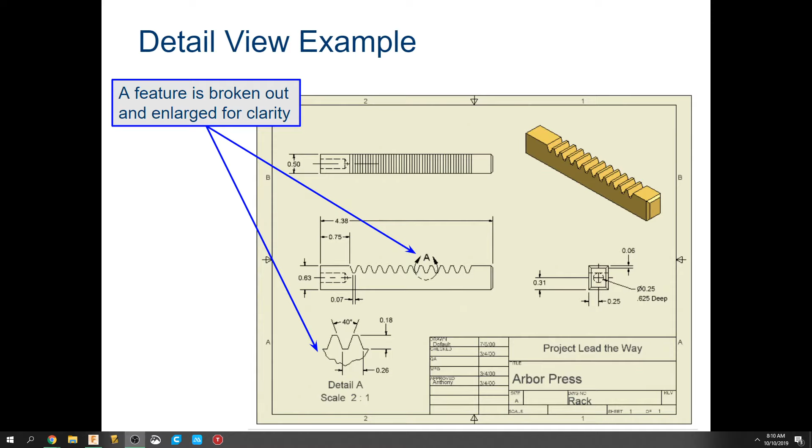This one's pretty simple because there's only two of those things that we practice. We talked about counter bore, we talked about countersink stuff. So you're going to read these dimensions and put it inside of Fusion. You're going to create the section view as well.

In the directions it says: recreate the drawings below using proper dimensions inside Fusion, create a drawing file, create a full section of the base plate, create a full section of the drill plate, and then download the PDF. So first thing we're going to do is make sure that I have this base plate up.

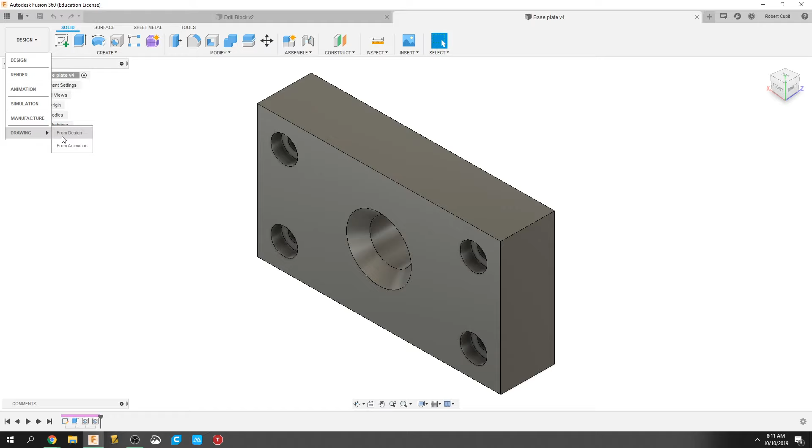I drew it already. So you're going to draw it just like normal, and then bring it into a drawing file. We don't really have to worry so much this time about the ASME and all that kind of stuff. I would just leave it in ASME, and I would keep it in inches. These ones work on C size, so we shouldn't have to worry about that. Press OK, it'll take a second to do its thing.

And then inside of this, you are basically going to go to downloads. Trying to add the picture so you guys can see it - base plate, there it is. It's right there. Oh, it's because it's a PDF.

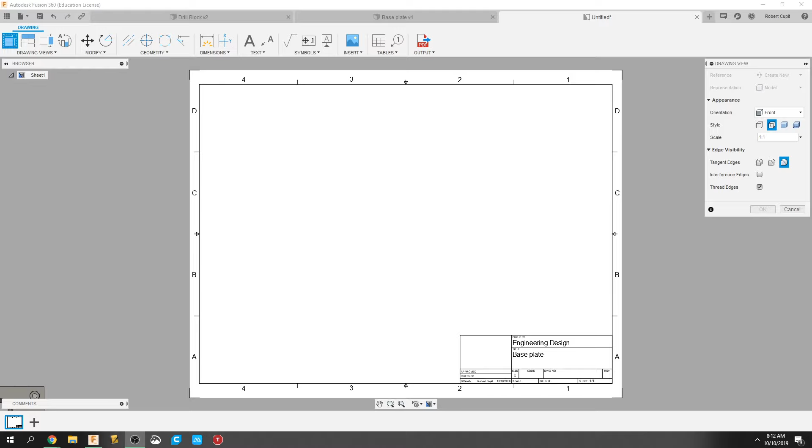That's okay. So basically, what you're going to see is the first base - we just got to bring in this first plate. You don't have to bring the isometric, you don't have to do a multi-view, you don't have to do anything crazy like that. What I would recommend, and I did it to this one, is I made it like 2:1, just to blow it up a little bit so you guys can see what you're doing. And then you're good to go on the first part.

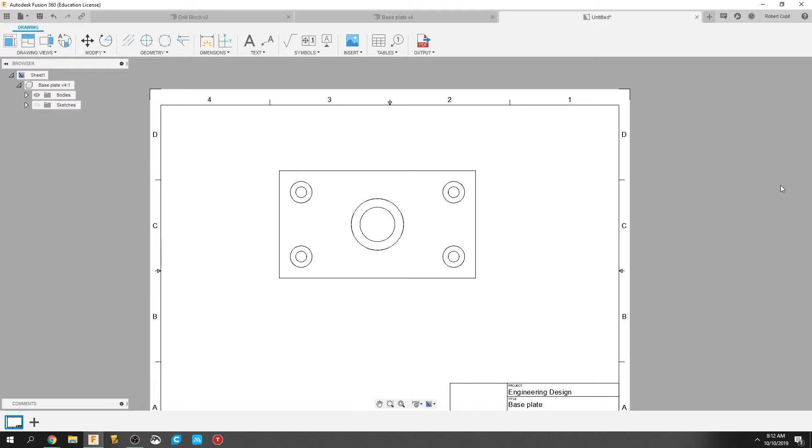So basically, let's create the section view first. I would just delete this outside border, so I just click it and press delete, just so I have a little more room. I'm going to move this up just so that I can see it a little bit better. And then what I'm going to do is create a full section view.

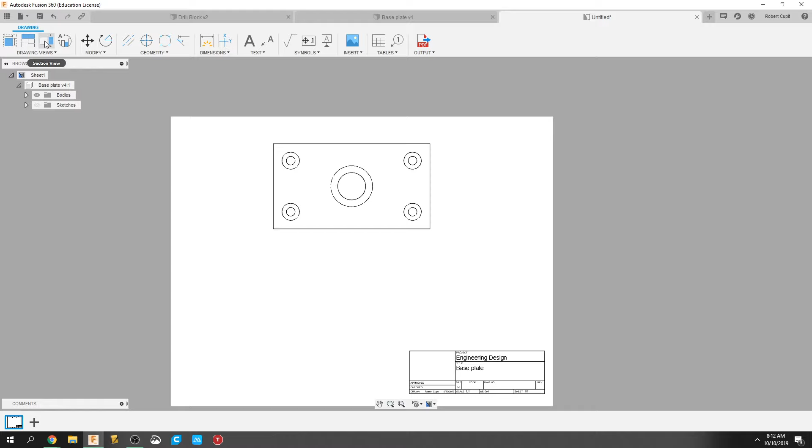Section views are the third thing on the list right here. So we did base, we did a projected view, and then we have a section view. If you click section view, the first thing it asks you to do is what view do you want to focus on. Then it brings open this little A right here, and all it's asking you to do is find the point that you want to draw the line across, basically.

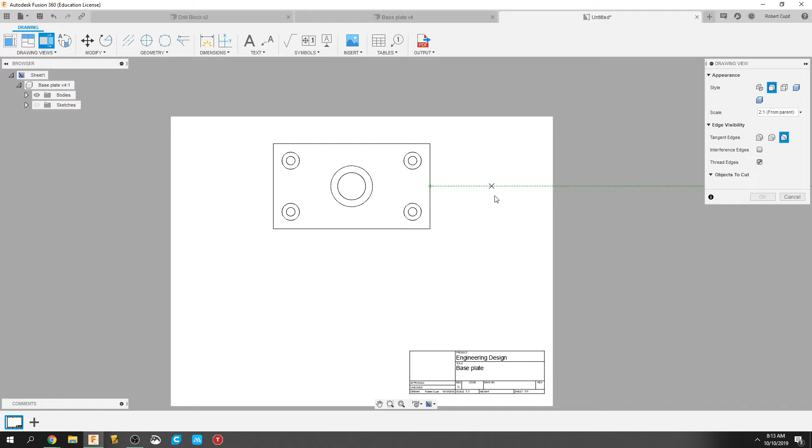So I'm going to do the midpoint, which is the center of that line, come across and hit this other midpoint. And then you're going to have this weird arm kind of bending here, okay? After you've clicked and you know that that line is there, you just press continue. It automatically generates the section view for you.

Bring it down or bring it up - it would make it different, obviously, it would change the view. Bring it down in this case, and then it'll take a second. You right click, press OK, and it generates the section view for you. It's really simple.

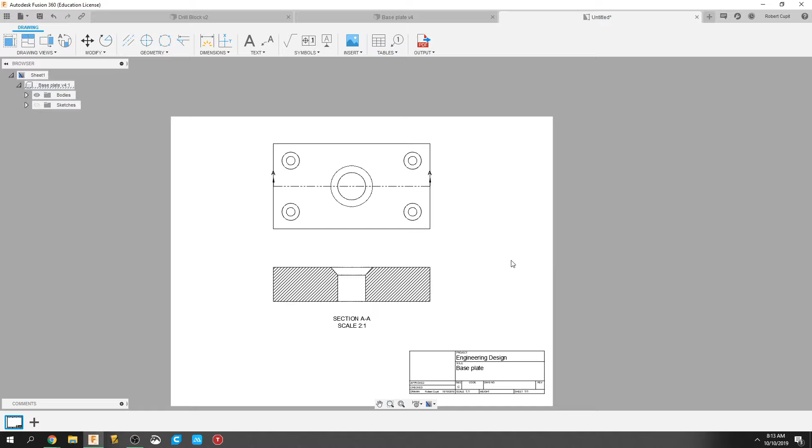Basically what you can do from here is I've created a section view - that's how easy it is. You can move this stuff. You can click here once and drag this out if you want it to look prettier, and drag this out again to make it look a little more pretty. But from here on out, it's basically dimensioning from here. This is the drawing file that you're going to submit.

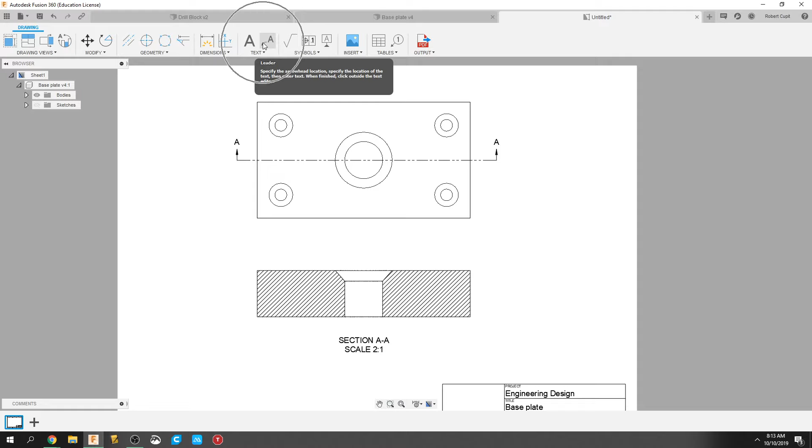From here you'll see these leader lines - you'll see an A with a little leader line. You click that line, and you're going to click the outside circle, and it allows you to generally type in everything that you're going to type in. What are you going to type in? Well, if we look back at Google Classroom and the base plate, I've already given you those answers. All you got to do is punch in what I showed you. That's pretty easy.

And I even dimensioned the whole entire thing for you, so you just dimension it again and you guys are good to go. The hard part, or the different part—okay, that's the easy part.

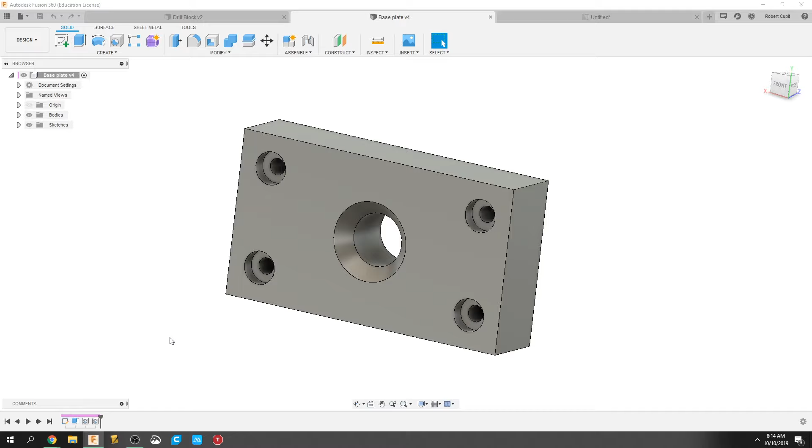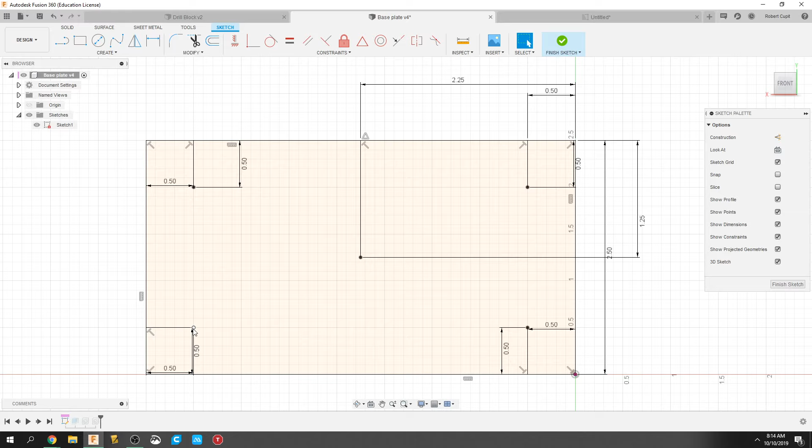What about drawing this stuff in the first place, though? Let's say, I'll show you, I drew these holes. The first thing you got to do is have locations for the holes. So the first thing I did, I'll show you the sketch, is I drew where I wanted all the parts to be. So I want the hole to be 0.5 over, 0.5 up. I wanted it to be 1.25 across, 2.25, blah blah blah. Put where all the lines and put those little points basically where they're going to be. It's just the corners of where you make them.

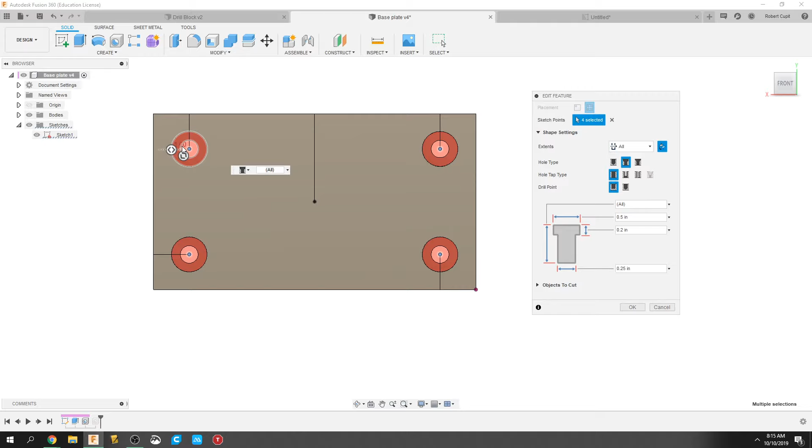After I did that, I went into the hole command, which is up here. Okay, hole—press hole. Don't do a circle and another circle and extrude it, it's not going to work the same. If you go to hole, I'll show you what these look like. Basically, the first thing I did was selected all 4 at the same time—1, 2, 3, 4. And then this screen pops up.

This is where everything is that you're going to input as far as dimensions. This is where you're going to figure out if you can understand this stuff or not. If it's through all, then all you got to do is put all—it just means it extends through the whole entire part. If it's a counter bore, if it's a countersink, depends on what it is.

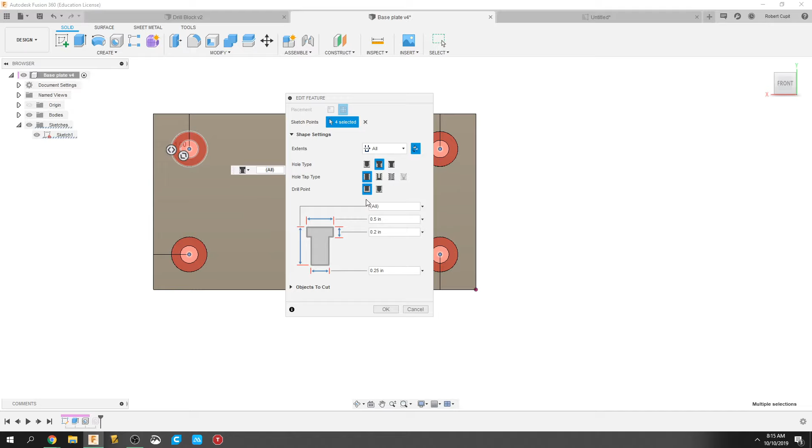Hole tap type, you'll never move it from simple, so don't worry about that in this activity. And drill point, I would leave it to angle just because it looks cooler, and there's nothing you're going to change in there. So we leave drill point to that.

In this case, all these drawings, if you look at the document here, they're all through all. So this one's through, this one's through, so we don't have to worry about anything at the bottom anyways. So for example, the big one right here that I'm on right now—or I'm sorry, the small ones—if you look at the small dimensions, they say 0.25 through, counter bore of 0.5, and a depth of 0.2.

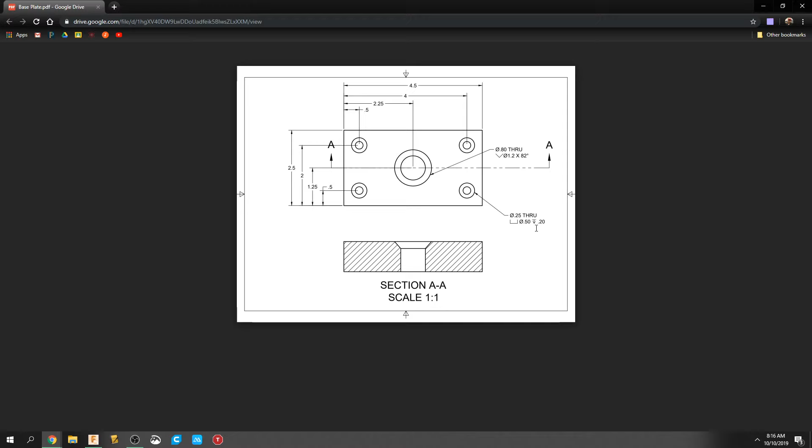So if I look at this, and I'll make this a little easier for you to see—if I look at this, you're going to see 0.25 through. So 0.25, and it's through the whole entire part. We talked about that first smaller number being this basic radius, or I should say in this case diameter.

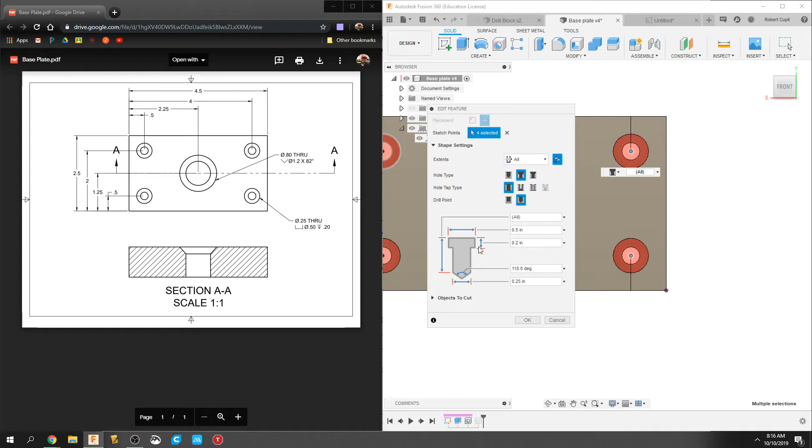The next number, 0.5, it's a counter bore, so I made it a counter bore, which is right here. And then I made it 0.5, which is this overall diameter, with a depth of 0.2. So it drops down 0.2 right here—that's the depth of the counter bore. I literally press OK, and if you zoom in you'll be able to see that that counter bore is set.

Same thing for the other one—the bigger one is a counter sink in this case, though. Still through all, still simple. In this case it goes through all, it doesn't matter. And this one shows you 82 degrees. The only difference here is that this one has 82 degrees, and that's where you put the angle in right there. Again, obviously select the center of where that goes.

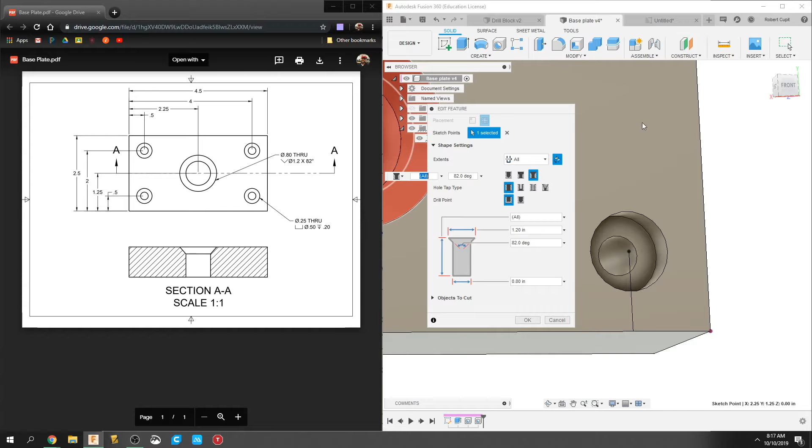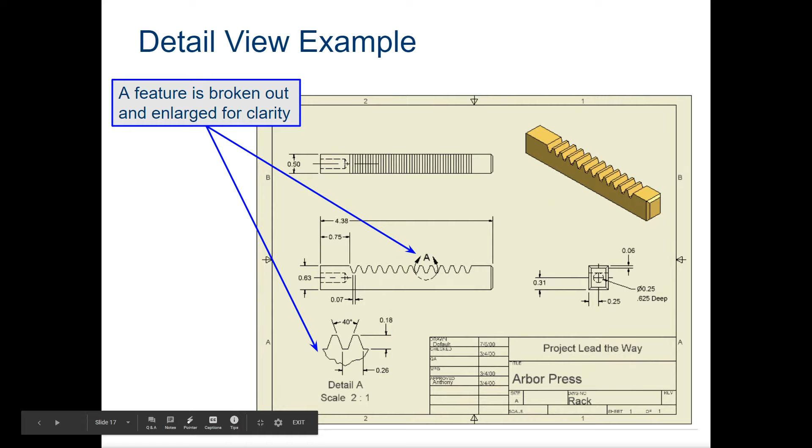I don't think there's any other differences—let me make sure. If we look at the Google Classroom here... oh, that's the activity, here it is. So if I look at this next one, I don't think there's anything crazy different. So depth, diameter—nope, it's all the same.

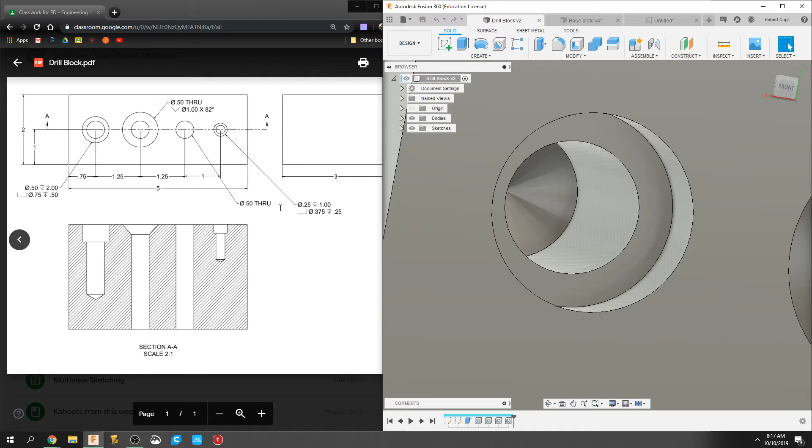In this one, you'll see now, if you look close enough, how this is like a cone at the bottom of this part right here, and that'll show you the same thing. You're going to do a full section across after you make the whole part, and just realize that all 4 of these holes are completely different in this one. Just makes it a little harder, makes you guys practice a little more.

So the end result for all of these is basically to create the drawing file that looks exactly like this. You got to draw the part, you put the holes in, and then you do the section view and dimension it like you see here.